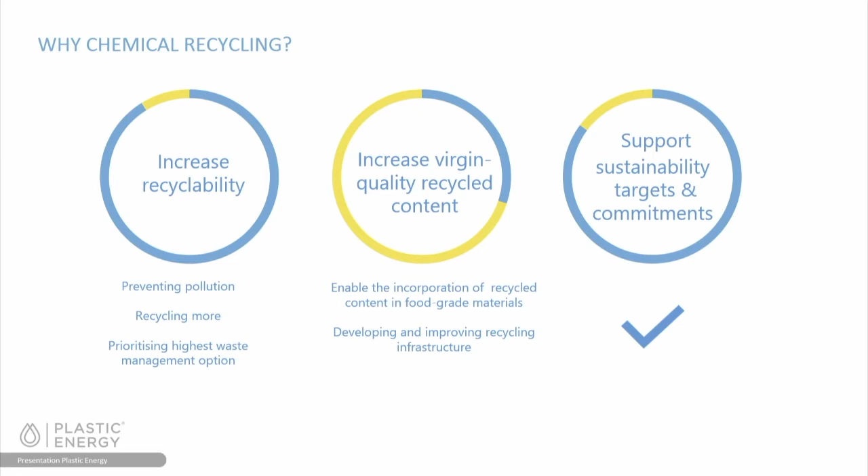a whole. For us as a company, we understand the difference between mechanical and chemical recycling very well. We started the business as a mechanical recycling company, and we know the limitations of what can go to mechanical recycling, what can go to chemical recycling, and what are the challenges with each one of them. Next, please.

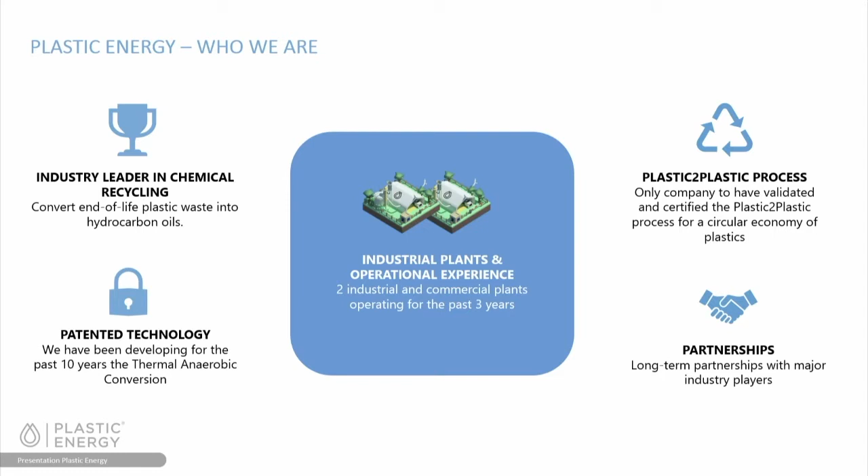So who is Plastic Energy? Plastic Energy was founded back in 2011. It is a company that has patented technology that we have been developing for the last 10 years, and has been the only company that has validated and certified externally the process of plastics to plastics for a circular economy of plastics. We have very strong partnerships across the value chain, and that has taken us into a leading position in regards to chemical recycling. Next.

Mainly, our mission is focused in 6 areas, but with only one target today, which is to deliver by 2025 at least 300,000 tons of low-grade plastic waste converted into feedstocks for new plastics manufacturing. That's what we call plastics to plastics. That's a global commitment that we have signed with the Ellen MacArthur Foundation that is public, and we focus all our efforts in delivering those commitments.

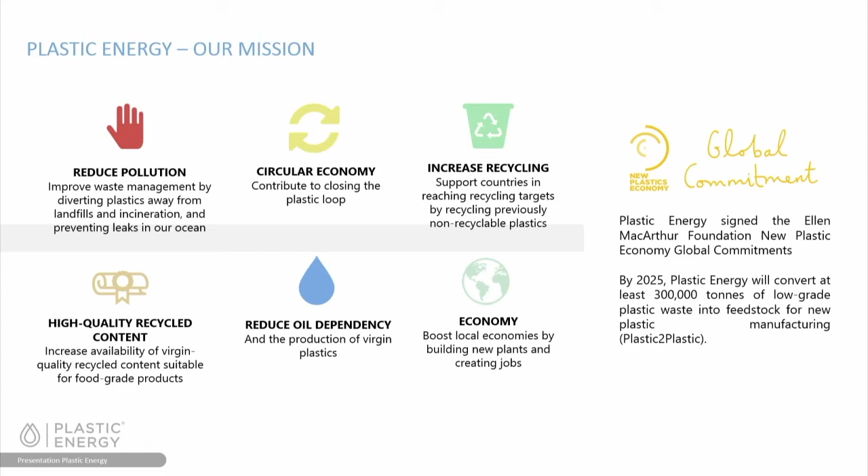By reducing pollution, one thing is the situation that we have in Europe, another thing is the situation in Southeast Asia, where they do not have waste management techniques to collect and sort the waste being produced. We try to close the loop for plastics by increasing recycling, not only in Europe, but also in Southeast Asia, always focusing on providing high-quality recycled content for virgin food-grade applications, reducing oil dependence and boosting the economics with new investments. Next.

The feedstocks is something that everybody is constantly talking about. What type of feedstock can be used by mechanical recycling or by chemical recycling, or is chemical recycling the solution for recycling? Well, as I said, chemical recycling is a complementary solution to mechanical recycling. Everything that could be recycled mechanically has to go through that route.

But there are obviously some limitations to mechanical recycling depending on the type of materials and the current design of products that have to be improved. Mechanical has limitations, but chemical recycling also has limitations. It's not a complete solution. The feedstock that we are processing is only post-consumer flexible packaging, mainly plastic films, multi-layers, and multi-material packaging, the type of materials that are difficult to recycle mechanically today with the current designs.

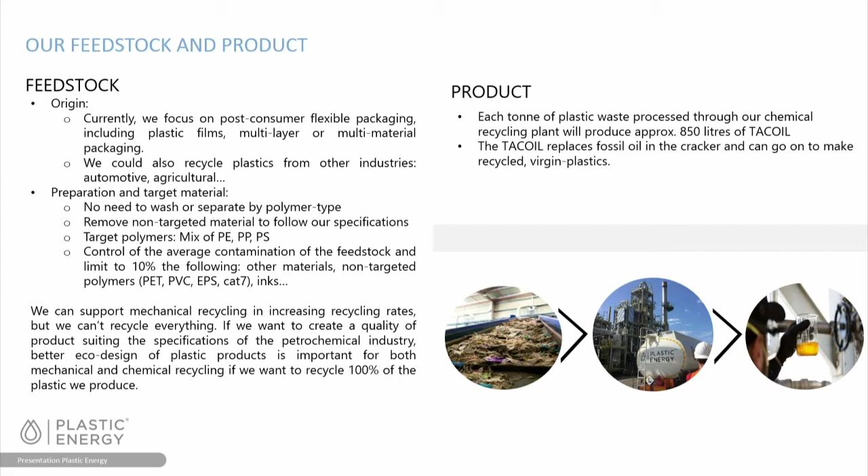Once we receive our feedstock, as you can see on the right side, the plastics coming to us are normally what you call in Germany the 350 type of specs. But the difference is that we do not need to wash the plastics. We do not have to separate them by polymer type. And we can process almost any type of plastics, except PET and PVC.

But can we take any type of contamination levels? Of course not. If, let's say, in the process we are working with more than 10% contamination coming to our technology, the output will be of qualities that could not be processed later on by the petrochemical companies to produce plastics once again.

Or the economics will not be very good, because only a percentage of the feedstock will be converted into hydrocarbons, with the same operational expenses for running the project. So when we prepare the material, we really try to reduce what we call contamination, and contamination of our feedstock can be from paper, carton, PET, PVC, and certain inks.

And over the last few years, we have developed a very valuable library of what we believe could really help plastics become more recyclable, either through mechanical recycling or chemical recycling. At the end of the day, for every ton of plastics that we process, we produce about 850 liters of TACOIL. That is a mass to volume ratio. As mass to mass, for every 100 kilos of plastics we produce between 65 to 70 kilos of a liquid product.

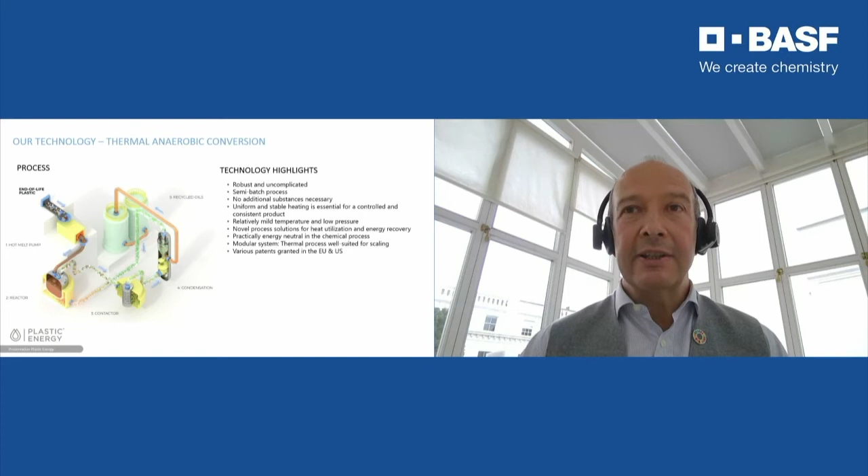We have different patents in the European Union and the USA, and the process, as you can see in this diagram, starts with the plastics coming to extruders. In that moment, the extruders melt the plastics. We increase the temperature to less than 300 degrees. Then we take it into a reactor, and from that moment, as I said, the energy is completely neutral.

And then we increase the temperature in the reactor to less than 500 degrees, then we take it into the contactor, then we condense it, and we produce the liquids that we later sell to the petrochemical companies to use as a feedstock to produce new virgin quality plastics.

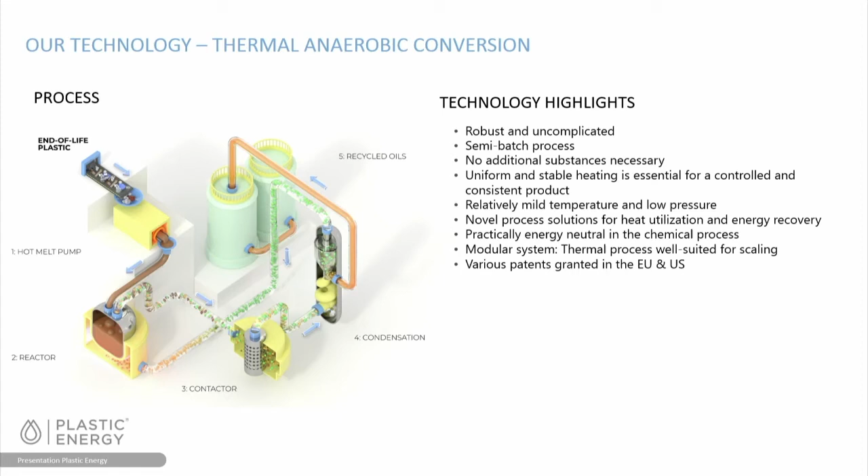We have two operational plants in the south of Spain, one since 2015, the second one since 2017. Currently, our plants are 100% producing TACOIL that is used in 100% of cases only for food-grade applications, only to produce new plastics. We do not support plastics-to-fuel alternatives, and we are only focused on the plastics-to-plastics concept.

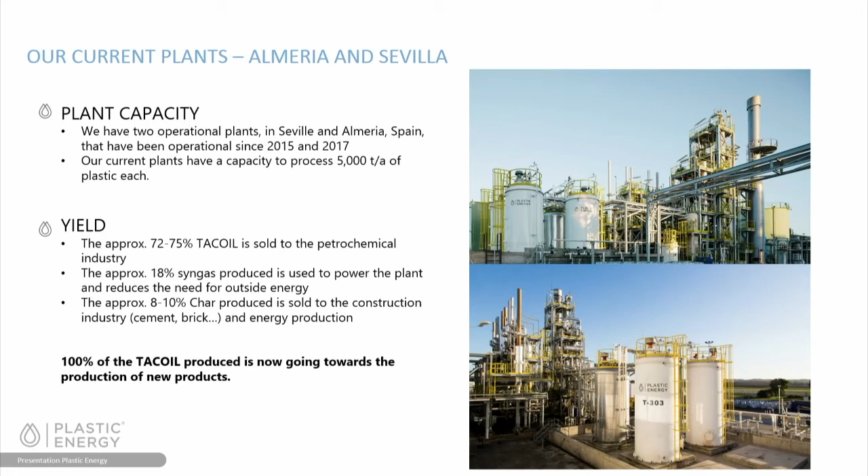The yields, as I was mentioning before, are about 72 to 75%. Then we produce 18% synthetic gas that we use to power the plant and reduce external energy. And we also produce, depending on the contamination of the feedstock, about 10% of what we call char, which is like a powder carbon that we sell to the construction industry and energy production. But 100% of our TACOIL, which is the majority of the outputs, is used only for the production of new products.

Next. Something very important: so far we've been listening to different comments about chemical recycling. And by the way, I'm only talking about one of the different technologies of chemical recycling. Chemical recycling has different technologies for different types of applications and materials, but I'm focused only on our process.

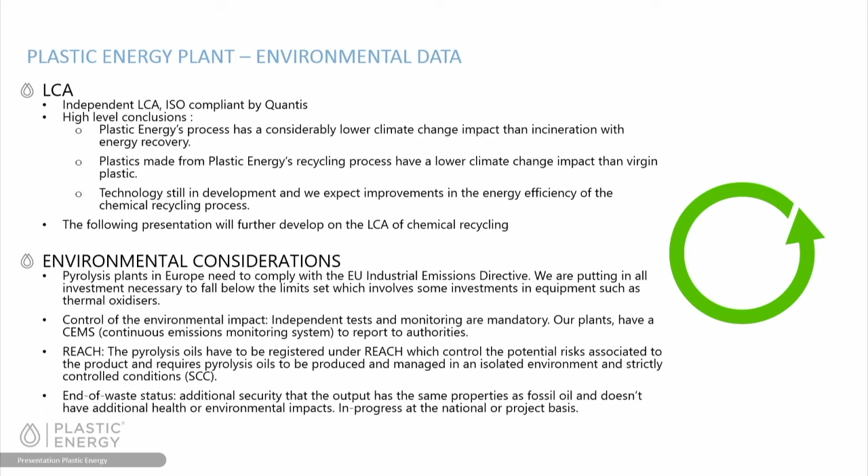Many companies recently have raised the challenge of the footprint of this type of process. In our case, we have done an independent, ISO compliant LCA by Quantis, an external company, and the conclusion of that report is that our Plastic Energy process has a lower climate change impact than incineration with energy recovery. That's very important to say. Also, it has a lower climate change impact than virgin plastics, which is something extraordinary and very important for the future of our planet.

And the positive thing is that this is only the beginning, because those types of technologies, in our case, are only 10 years old, but in the years to come, we can see many improvements being made in those types of technologies. In our case particularly, continue improving the energy efficiency in order to further reduce the carbon footprint of our process. I know that there are going to be some other presentations later on about LCA, so I'm not going to

extend any further. Some important environmental considerations are that we need to comply with the European Union Industrial Emission Directive. This is not just a plant that somebody built that produces all types of contaminants and releases them into the atmosphere. First, we are in Europe, we have to comply with regulations, and in our case, we fully comply with the European Industrial Emission Directive.

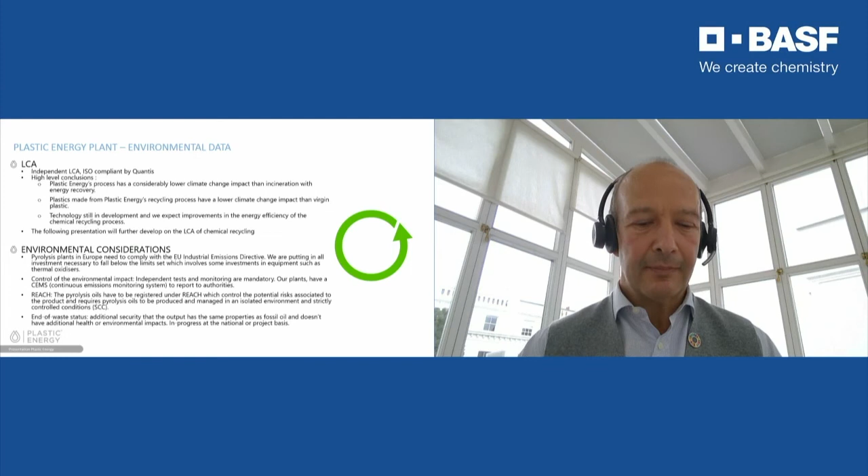It's important that this is not a theory. As I say, we've been working since 2015. We have demonstrated closing the loop. We have produced different food grade.

Sorry, I have a problem with my connection.

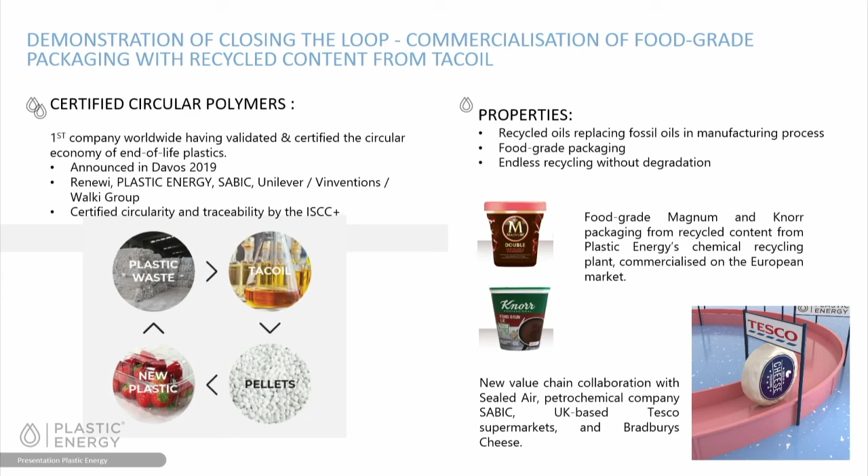So we have demonstrated the different products. Back in January 2019, it was announced in Davos: different products made from our pyrolysis oil, TACOIL, that through SABIC produced products used by Unilever, Vinventions, Walki Group, and they were all certified by ISCC+. Also, recently we announced the production of different applications for Magnum tubs and also for Knorr, or lately with Tesco and Sealed Air to produce the Bradbury's cheese. So those are clearly examples that are right now in the marketplace.

If we go to the next page, please. Hello? The next slide. Go on. We have the next slide. Yeah. Please go on. Yes.

So on the next slide, we can see that the real target for the company is to be able to build about 10 plants by 2025, with each of those plants having at least 20,000 tons per annum production capacity.

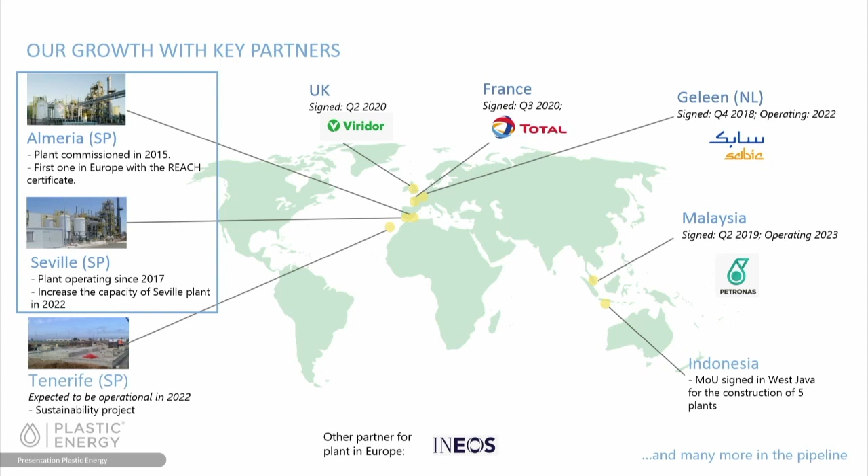And if we move to the next one, you can see the current pipeline of projects with the 2 plants in the south of Spain that we are going to expand, the plant in Seville, another project in Tenerife that is going to be an example of sustainability on an island with limited space to manage the waste, and in this particular case, producing a recycled output that is going to be used 100% for food grade applications. Projects in France recently announced with Total, or in the UK with feedstock coming from Viridor, in the Netherlands with SABIC, Malaysia with Petronas, or Indonesia, in different countries.

So those are our commitments, and we have other projects in the pipeline, but really our main focus now is to deliver the 10 plants by 2025. Thank you very much for your time.

Thank you very much, Carlos. And we have got one question directly to you, as I said, a clarification question from Frank Holtrup, Covestro.

Hat das TACOIL eine relativ konstante Zusammensetzung, or a consistent composition, or does it vary depending on the plastic waste you use?

Yes. It is relatively stable. Over the last 5 years, the specs have been very stable within the same range. But obviously, that is also because we have clear specifications on the type of feedstock that we want to process. So it has a direct relation with the type of feedstock that you process.